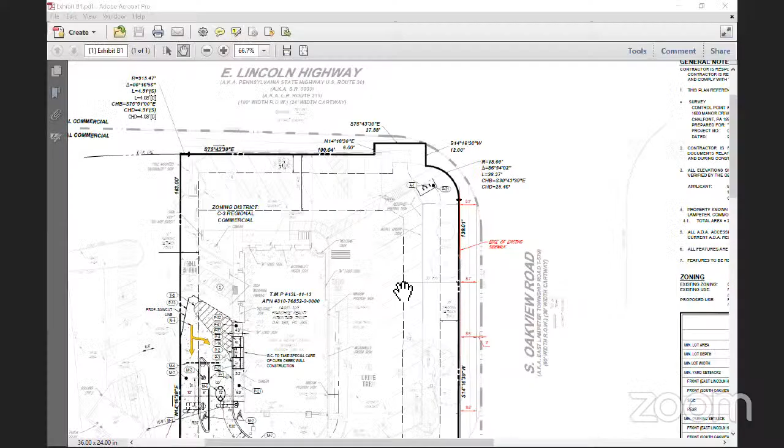Yep, it's there. Okay, so this is the site, and what we're showing along the frontage of South Oakview Road is a little hard to see. Can you zoom in a little bit, Seth? It's a little small on this screen.

If you can see the red lines there, that's delineating really an expansion of the existing sidewalk, and the edge is shown right, really almost directly on the property line, although it comes off the property line at some points. So the total width we were proposing was between 8.6 and 9.1 feet wide, and it would reduce the area between the curb and the sidewalk down to around 2 feet in some instances, maybe up to 3 feet, depending. We weren't going to change the western edge of the sidewalk, just expand the sidewalk.

So we proposed that to staff. The response that we got back, and I'll allow Ralph to elucidate his view on it after I'm done, is that they were conceptually okay with the width issue, but they did not like the idea of further reducing the distance between the edge of the pathway and the curb, and they wanted to maintain that 5-foot separation.

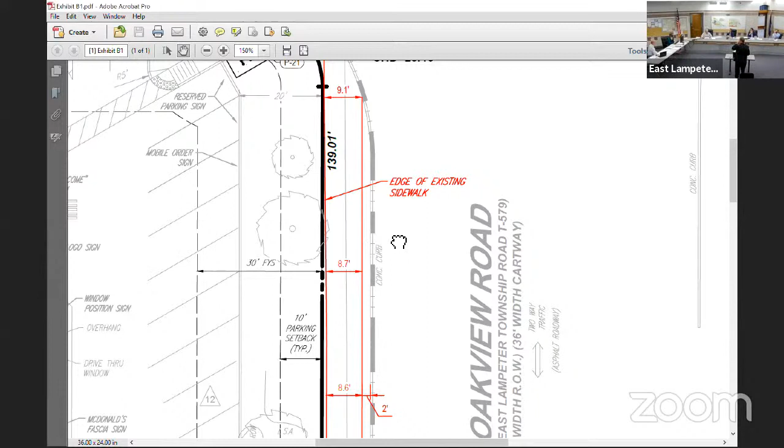And for recall, the original request is for drive-through lanes, right? If you could zoom out, Seth. I feel like it was last month, but it clearly was longer. It was February when we were here.

So if you look, it's just that opposite corner there. We were reconfiguring that drive-through and removed a couple parking spaces. And again, part of what we were intending to do there, no increase in impervious, so we didn't have to deal with the fact that we're already non-conforming on impervious, or the stormwater impacts of increasing impervious coverage. So that's really the intent there.

And I'll let Ralph talk if you want. If there are any questions from the board, please. From the staff's perspective, what was the proposal if we basically use our right of way to construct - was the plan to construct the full path as envisioned in the streetscape plans, the grass median strip, and then the full 12 feet? If we can move the curb to the east, yes.

Would it be feasible to basically say the condition is, at the time that we move the curb to there, the applicant installs the full 12-foot path in that dirt space, since you can do it for real cheap?

Yeah, and again, part of the issue is timing. At this point, the developer is not looking for a condition that's hanging out there. We either want to do this and move on, or we'll pay money. But the fact is this really should have been permitted in April so that we could be under operation. That's part of what their anticipation was.

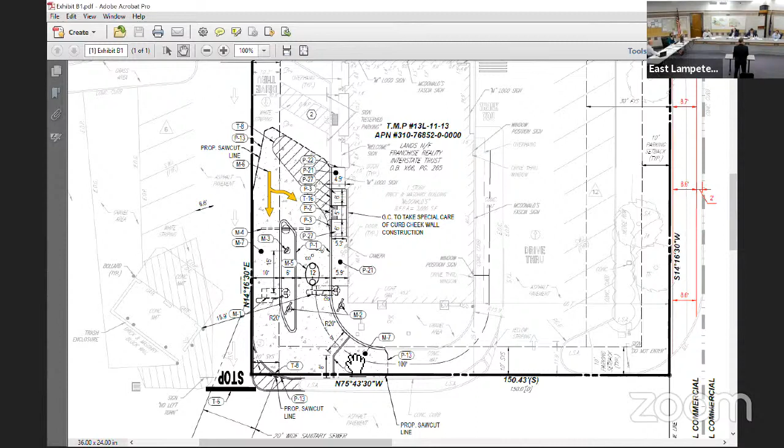Make sure I understand. You showed a plan up here that had 9 feet or so, between 8.6 to 9.1, something like that, or $10,000 contribution. Right, $10,000, correct. Yep.

I'm just trying to clarify what you were asking. Are you saying that the applicant would be okay with the 12-foot? No, what he was asking is, you're still on the 9-foot. So what he was asking is, would we expand it? I think for board purposes, the applicant is either at this 9-foot plan, not the 12-foot that is in the streetscape plan, or...

$10,000. The 9-foot plan would be with the materials that we have outlined in the streetscape plan. Yeah, I believe it would be the macadam and the underlay that they had proposed.

And going forward, if we do improvements to South Oakview, we would end up moving the curb out, therefore providing a wider grass strip separating. Right, it would still be 9 feet, the actual macadam path would still be 9 feet unless for some reason we did something different. But yeah, at that point, if we moved the curb, there'd be extra grass, right, Hutch?

There would. From staff's perspective, the design all the way from Strasburg Pike, coming to Oakview Road and getting up Oakview Road as far as we can, is 5 feet of grass behind the curb and a 12-foot wide trail. It would shrink, and that would be less than ideal.

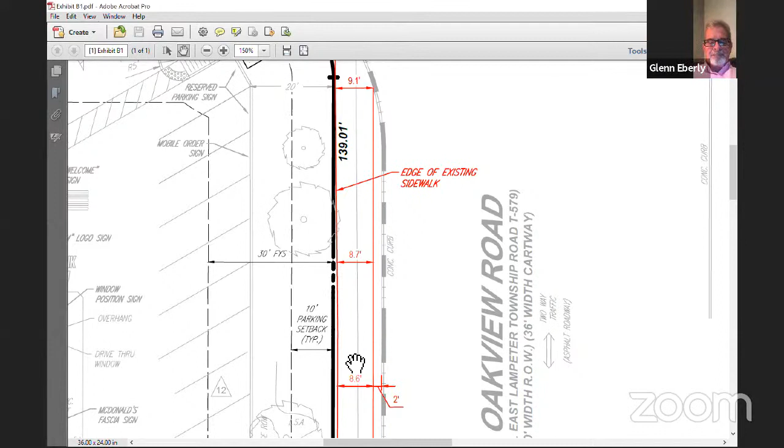Motion seconded by Dave. Any other comments from the board? No. Glenn, any comments? No, sir. Any comments from the applicant? I don't have any. Any comments from the public? Nothing on email, nothing on Zoom.

We'll do a roll call vote. In favor of the motion: Glenn, aye. Dave, aye. John, aye. Ethan, aye. Motion passes. Thank you, gentlemen.

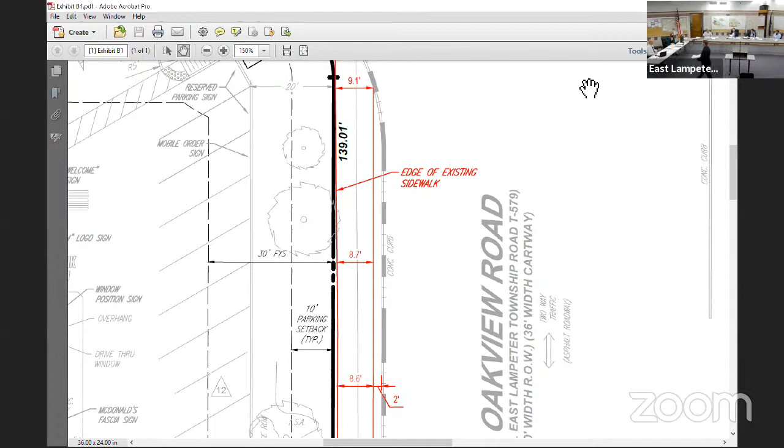Okay, next on the agenda we have 6A, resolution regarding planning module for Turkey Hill Car Wash, 5 Strasburg Pike. Oh, I'm so sorry, please, sure, I'll cut that from the record.

5B, we have old business: request for time extension to record approved plan 21-07, Ben Franklin Boulevard. I see Tony. Anyone else here for that item?

And Mark. Oh, hey Mark, you're so close to the camera I didn't recognize you. There you go. I think I fell forward when you jumped over our agenda item and moved into the next category. I apologize, I wasn't worried. We've had a conditional use hearing at 5:30 PM and we're still going strong, so it's all yours, Mark. I think, I hope, let's put it that way.

I think, and I hope, we can keep this short. Earlier this month, on April 5th, the board conditionally approved the Ben Franklin Boulevard right-of-way plan. We accepted the conditional approval and sent the acceptance letter to Tara. As part of the initial submission, we had requested a 180-day extension over and above the 90 to satisfy conditions and record the plan. Our thinking is that we're going to mesh the HOP process and the recording of the plan, so we can accommodate the plan recording and the granting of the right-of-way, working with the township, and mesh it with the highway occupancy permit process for the Walnut Street extension plan. At this time, what we are requesting from the board is a 180-day extension, which would take us through December 31, 2021, to satisfy conditions and record the plan.

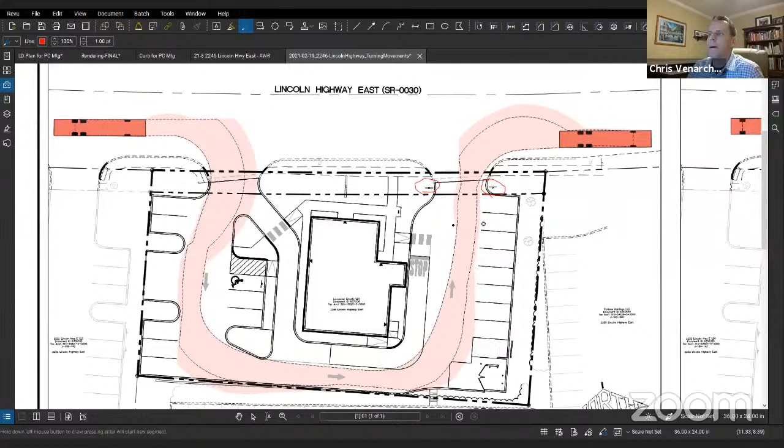And then when people come in the site, can jump to the rendering again. There's some signage here that would show the drive-through where you enter the property and head into the drive-through lane, or just come into the property through the parking lot itself.

I'll also point out to the board, there was a question about the curb line being right here when someone comes into the property. So we looked at discussing with the Planning Commission, pulling back this curb line a bit, just to allow a little more room there when someone comes through to make the decision, either head into the parking lot or head into the drive-through. And I think when we went back and looked at the turning movement, that'll help with fire apparatus as well as delivery trucks coming into the parcel.

As far as site layout, we have the required parking per zoning. Again, we have a drive-through that's one-way circulation across the back here.

As far as public sewer and water, the property is existing today being served by public water through the city of Lancaster, public sewer through the East Lampeter Township Sewer Authority. We have reviews back from both groups, essentially very minor comments with some notations and clarification about the actual connections out at Route 30 for the services to the property.

I mentioned the property is a half acre, so well under the 1-acre threshold of an NPDES permit. However, again, we are doing stormwater design for the water quality portion of the project. An E&S plan has been submitted to the Conservation District. We did receive a review on that with very minor comments. We expect to get that in this week, so I expect that to get turned around pretty quickly.

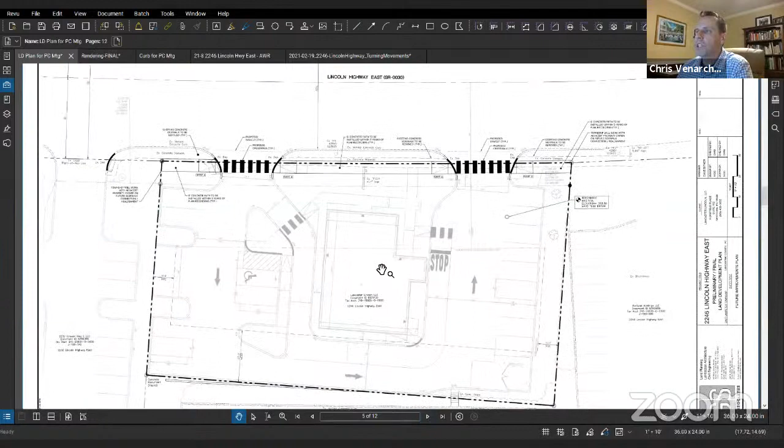So within our plan set, much like we did with the neighboring property to the west, we have what we call the future improvement plan that shows the introduction of the pathway across the front of the property. In working with staff for this stretch across this property, it was requested for a 6-foot concrete path and then maintaining a minimum 5-foot buffer area. So this plan does set that up.

If I can, please—staff, I have a concern that it doesn't indicate the measurement of 5 feet on that. We also contemplate as part of some future project moving the curb north in this location. So I would think it would be helpful to show on this plan that the curb is to be relocated and that the 5-foot distance is to be incorporated into the design.

Chris, did you hear that? Yeah, I know the 5-foot dimension. This will probably be approximate on this PDF—it's not CAD—but we have the 5-foot showing just over 5 feet, so the 5-foot buffer is provided on the plan as shown. The shifting of the curb I was not aware of. That's the first time I've heard that.

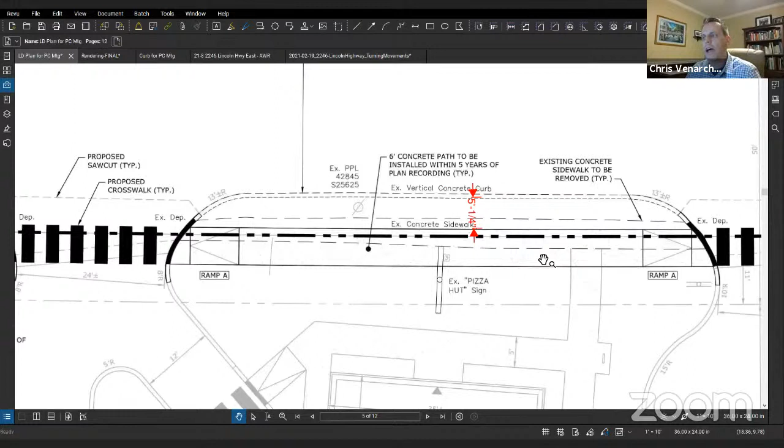And yeah, the scaling might generate 5 feet. I guess I'd feel more comfortable if there was actually a number put on the plan that it's going to be at least 5 feet. Sure, absolutely. Yep, we can do that.

It's not a problem, but the curb is going to be relocated north. So the curb relocation, is that something that typically would be put on the plan? If you're going to reflect the future improvement out there, that would be the thing to reflect. Okay, so I could follow that.

So you're saying that in the future, at some point, the idea is to move the curb line north 2 feet. So then as our plan is drawn, we'd have 7 feet of buffer, which from our standpoint is fine. I just want to make sure I'm understanding it correctly.

I would say that same thing too. You just need to give the applicant clarity. Is he putting a line on here showing the curb at a future point north and then saying 7 feet on the drawing to reflect that the curb is going to be moved? Or does he keep it where it is, put the 5 feet, but then we don't have a curb line on here for where it's going to be in the future?

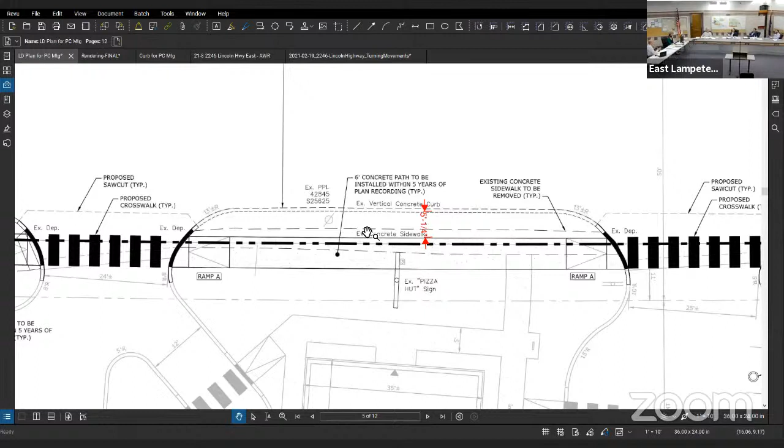Right, we haven't designed that area, so we don't know exactly where the curb is going to end up. But I would suggest that an indication on the plan saying that 5-foot strip is to be a minimum of 5 feet between the curb and the future sidewalk would be appropriate. Okay.

I follow that. Follow that, Chris? Right, yeah, the applicant would be installing the improvements once designed. Chris, can you just back out just a little bit?

So I know on the current Pizza Hut plan, there are parking spots near the entrance, but you didn't have essentially the same sort of left or right, quick decision right off the highway of whether to go to the drive-through or to regular parking. Now I'm assuming the drive-through is on the left and parking is on the right, those two front spots.

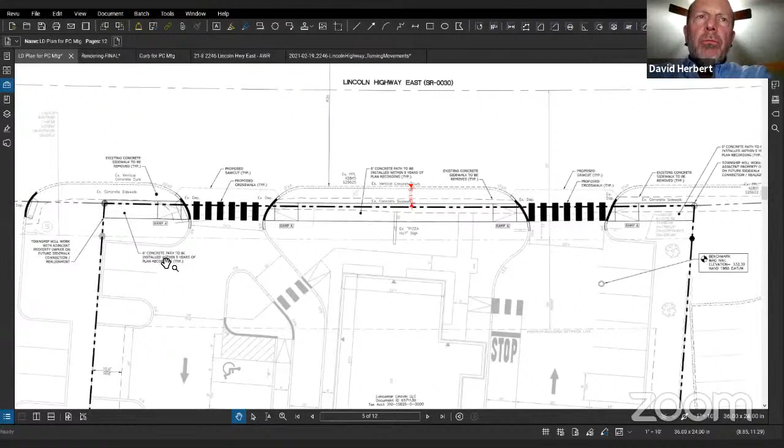So if you have a car parked there and they start backing out, and now you have a highway—it's called Lincoln Highway East—people coming off that highway going 10, 15 miles per hour plus, potentially turning right into a car that's backing out, with their back going almost into Lincoln Highway because it's one way, right? In the Pizza Hut setup, you could park in that same spot, but you'd back out going the opposite way and go out through what was an entrance or exit at that point.

So I do have some concern. I was at Stauffer's in Rohrerstown and I saw like 3 potential accidents in a matter of 3 minutes sitting in my car with people backing out of a similar setup. Cars were coming around the curve and cars were backing out of spots, and people are always in a rush, and people don't typically back in. So any thoughts on those 2 spots there? I realize you have to meet the minimum number of parking spots, but from past conversations with other restaurant owners, it seems like drive-through is the big business, right? I mean, so I said a lot, but can you comment on any of those items?

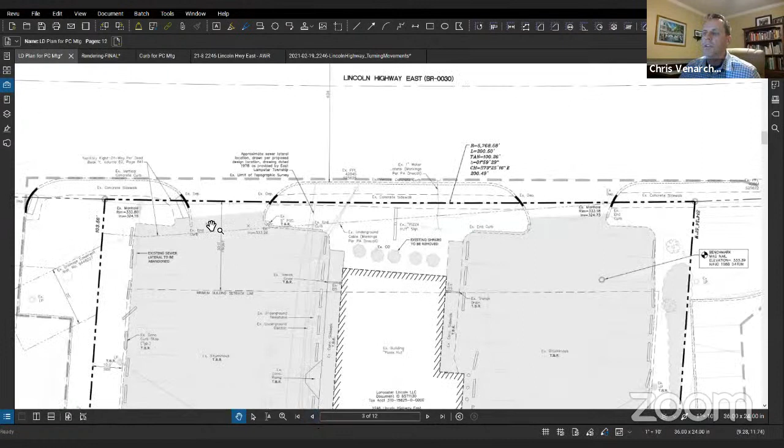Yeah, sure, let me jump back to the land development plan. So not that we're making the situation any worse—I don't know what kind of history there is, if there were accidents here. You could see we were up probably a little tighter to Route 30 under the existing Pizza Hut. You're right that they had the ability to go out this way, if they wanted to, they could back out and exit.

Under this plan, you can see the property line relationship here, versus... well, I guess it is back a little bit further here from that property line. Oh no, I'm sorry, that might be the proposed right of way. That's the proposed right of way versus the existing. So this is the existing right of way, so we are up closer. That proposed right of way is probably about here.

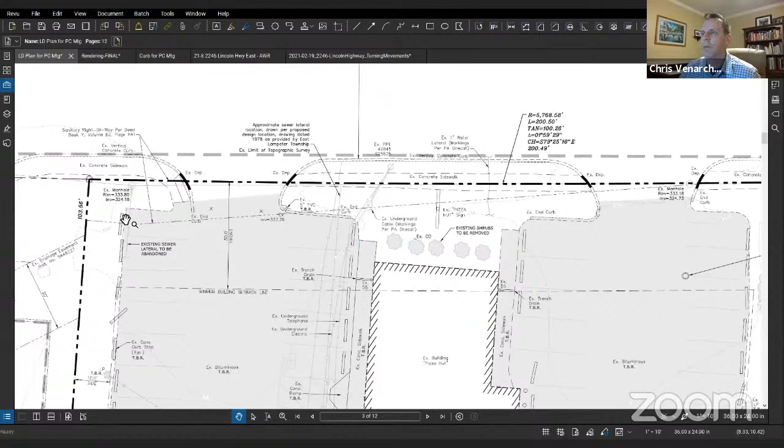But in any event, I think that ties into the question that came up about that entrance. So I think we can pull this back a little more aggressively just to open that area up a bit. But as far as someone coming into the parking lot, you're right—parking lots, I tend to grip the steering wheel a little tighter myself when I drive through a parking lot, just because people are always pulling out, pulling in.

I think it just takes care of itself. Hopefully people aren't ripping in there after coming off of 30.

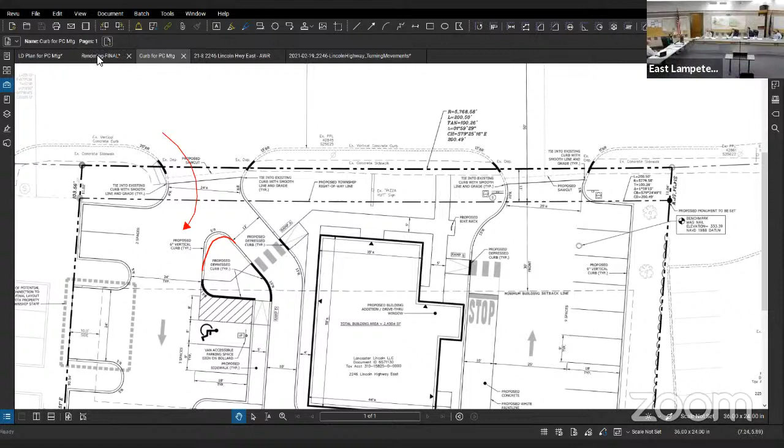Chris, could I make a suggestion? Could we not designate that very first space as employee parking? The employee being more cognizant of the road, coming once and leaving 8 hours later, would have a better handle on understanding that movement. So if we could designate that top space as employee parking and instruct those employees accordingly. Like that idea—also have your employees back in, maybe that saves a headache too. Yeah, I think that's a good idea.

I guess my other question is, do we need that cut through from the Apple property to the west? Is that necessary? I'd be interested in staff's or other board comments on that. I typically like being able to cut through for similar properties—say I get food for one kid on the Apple property and then come over here for the other kid. But the whole drive-through thing is where I'm getting caught up. I mean, clearly I could park and just go in, but I don't know. I just want to hear other thoughts on that cut through.

As you know, staff has been working on access management along the Route 30 corridor, and 2232 was one of the properties adjoining that we asked to enter into an agreement with 2246. Although this is coming in as a Popeyes now, there are multiple options over at the 2232 site, and we don't know what this will be in the future. This is in for land development now—if we don't get the access management now, we may not get it later. I understand it may not work perfectly, but staff believes access management is more important than that downside.

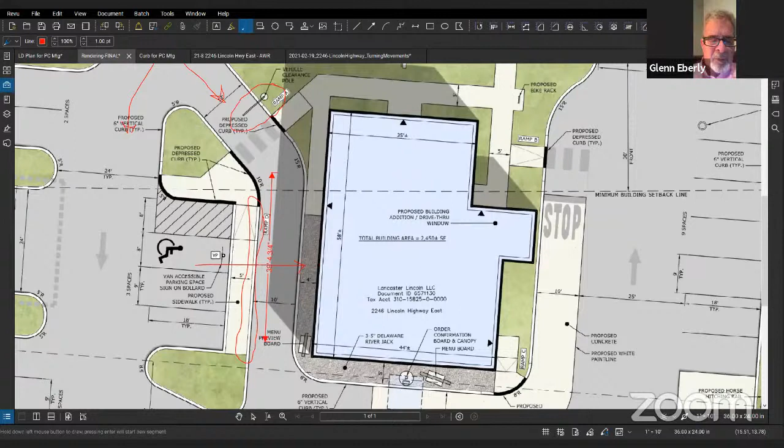They had mentioned about doing some stormwater. Will that take care of the bad ponding that Pizza Hut had at both entrances? They always had ponding at both entrances. Good question. Yes, there was some sidings out there that caused some ponding, and this site's being regraded to ensure positive drainage to catch basins. Great, thank you, Glenn, for bringing that up. That's definitely an issue on the current property.

Okay, I'll accept the motion and then I'll open it back up for any board or public comment.

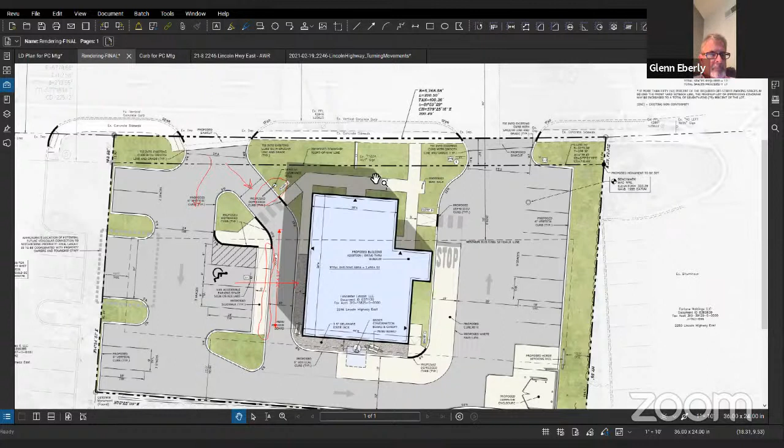I'll make a motion. I move that we approve the land development plan 21-08 for 2246, conditioned on the March 16th letter from David Miller granting the 7 waiver requests according to this letter.

And requiring the barrier, whether it's a chain or a fence, restricting pedestrian movement across the drive-through. We would like the motion to also include having a 5-foot dimension minimum referenced on the plan for the grass strip beyond the sidewalk.

Parking. That the entrance to the property from the west, through the west property, would be marked right turn only.

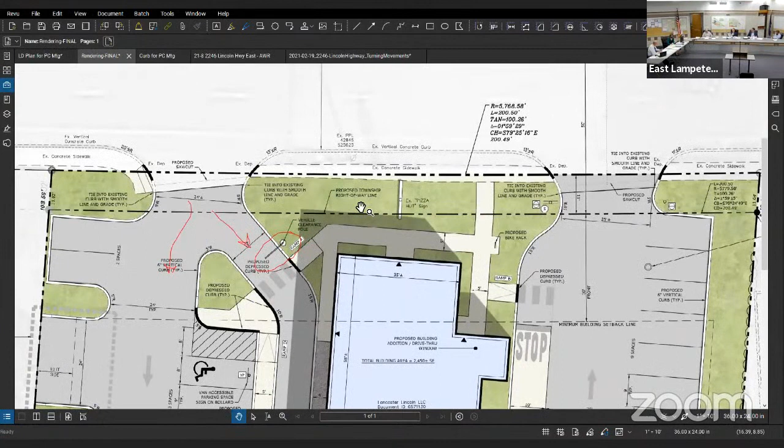I'll make that part of the motion that we do expect a deferral agreement for frontage improvements according to the street statement. I think you captured everything. I'll second that motion, Dave. Motion was made and seconded. I'm not going to repeat the motion because it was lengthy, but it was complete.

Are there any other comments from the board first? No. Okay, any questions or comments first from the applicant?

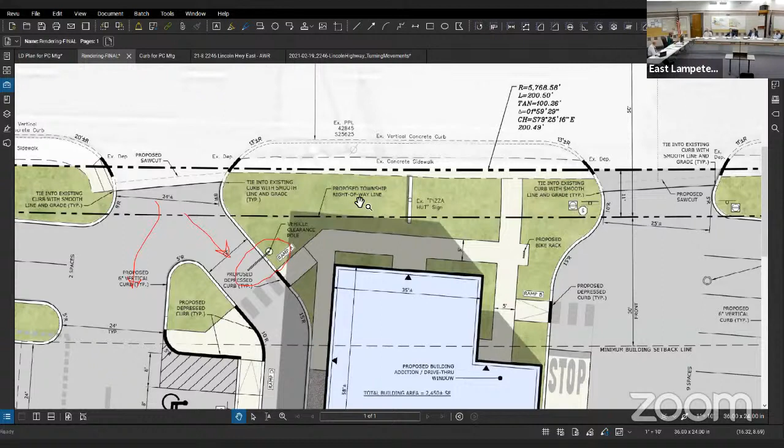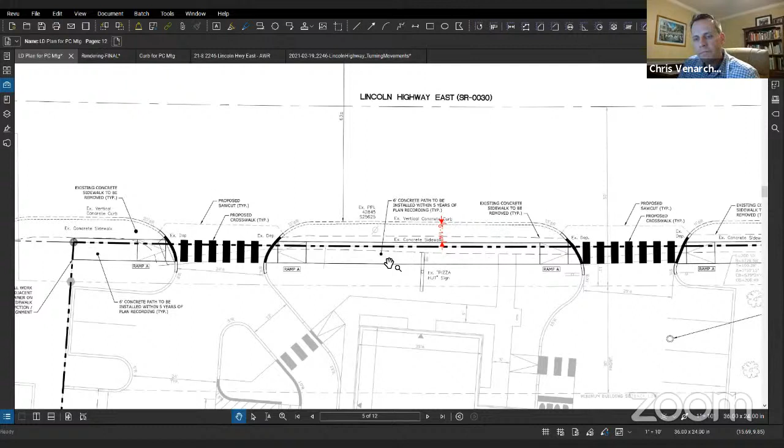I guess with the streetscape plan, just clarification on that. So we will show that 5-foot dimension will include the walkway. I didn't catch all of that, I think the mentioning about the streetscape plan. It's the deferral of the actual walkway improvements there, Chris. The walkway, right, as I have up on the screen now. Right, okay, thank you.

Okay, any other questions from the applicant? I don't think so, thank you. Okay, thanks. Any questions from the public? If you do have a comment from the public, just state your name first, please. Okay, no comments via email or anything.

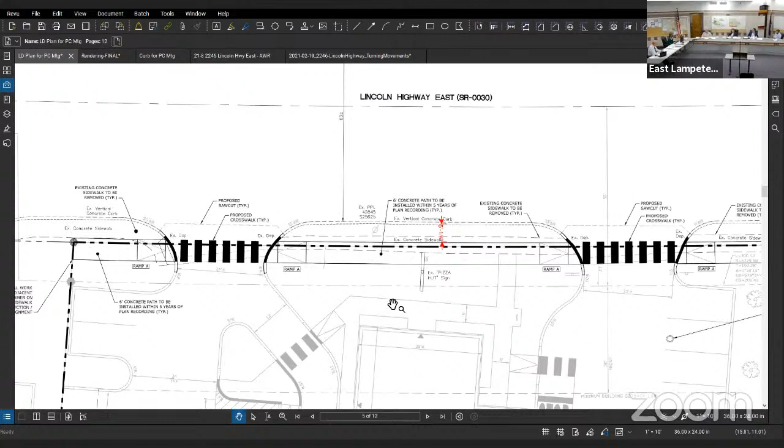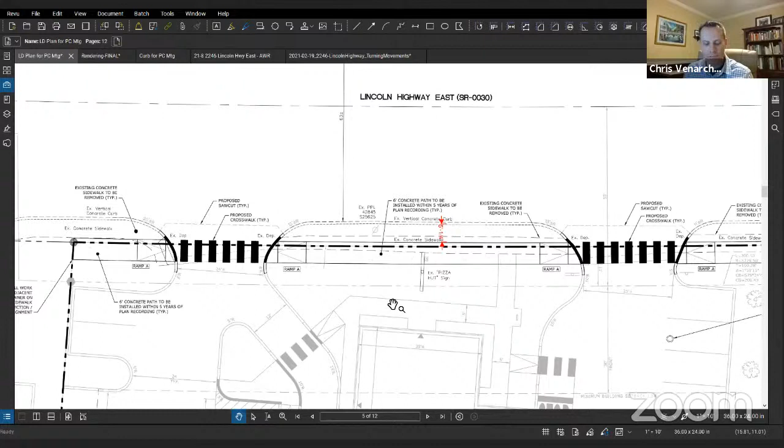Okay, we'll accept the motion, do a voice vote. Glenn, aye. Dave, aye. John, aye. Ethan, aye. Thank you very much. Motion passes. Looking forward to seeing the new Popeyes. Thank you very much, appreciate it, thank you so much.

Okay, next on the agenda we have 6C, Ames Reese request for waiver of land development planning, 2575 Old Philadelphia Pike. I'm assuming no one's here for that item. This was a... Tara, give us some context.

So in 2016, Ames Reese came in and asked for a temporary waiver of land development for a storage container at the front of their building, to get them through storage needs as they went through the land development process. As we all know, they did begin the process, it took a number of years to almost get through it, and the land development process fell through. They are now coming in and asking for that storage container to be a permanent structure on the property as a full waiver of land development. Got it. It also was constructed properly, met all of the UCC requirements as a commercial building when it was put on the property. Okay, so it's a quality building, it met all code and everything.

That's correct. Okay, understood. I'll make a motion that we approve the request by Ames Reese for a waiver of land development planning for 2575 Old Philadelphia Pike. Motion made by John, second by Dave. Any other comments from the board? Any comments from the public?

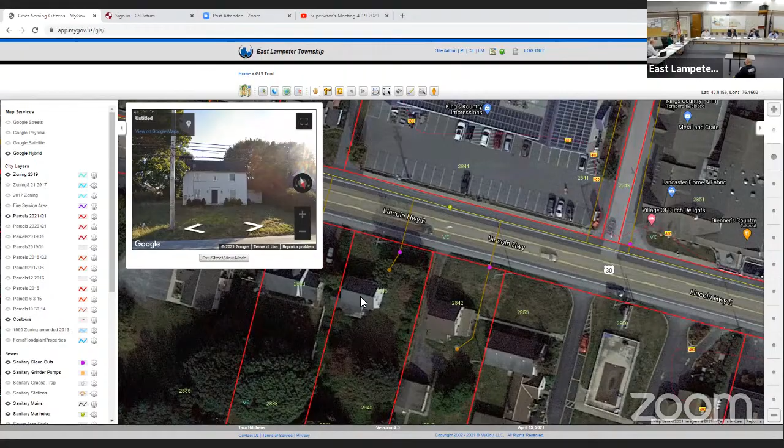So we have multiple liens as explained, over $11,000. This is a lien collection execution for 2840 Lincoln Highway East. I move for lien collection execution on 2840 Lincoln Highway East. Motion made. Second by John. Any other comments from the board?

Comments from the public? Okay, voice vote - Glenn? Aye. Dave? Aye. John? Aye. Ethan? Aye. Okay, motion passes.

Manager's report, Hutch. We've continued to work with representatives at High and their consultants for the Walnut Street Extension and the Greater Lancaster Heritage Pathway. We are now moving more aggressively to identify funding for the pathway itself. We have an updated estimate of cost for the pathway, which will help us go ask for or identify sources of funding to actually build the path. It's still considered most desirable that we build the road, the Walnut Street Extension, and the path at the same time. There are concerns that the stormwater management facilities constructed as part of the project could get disturbed if we don't build the path at the same time, creating stormwater management issues. So we'd like to avoid that, and we're working hard on it. If there are any questions, I'm happy to answer them.